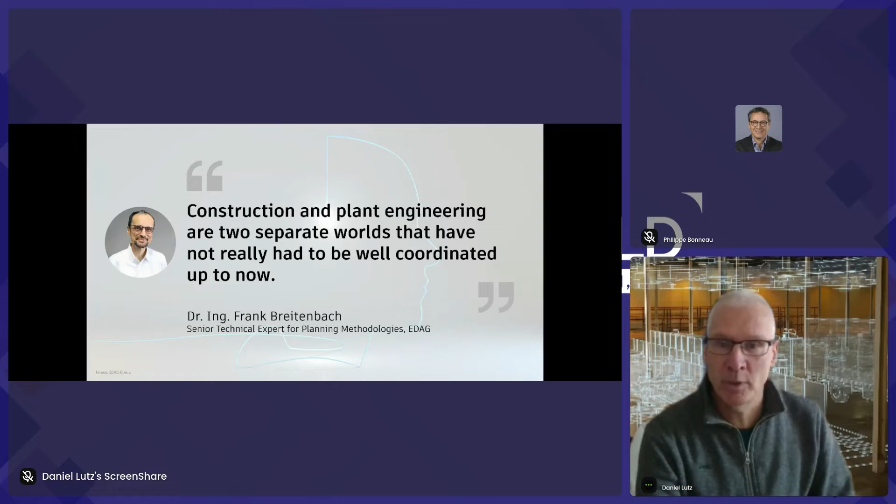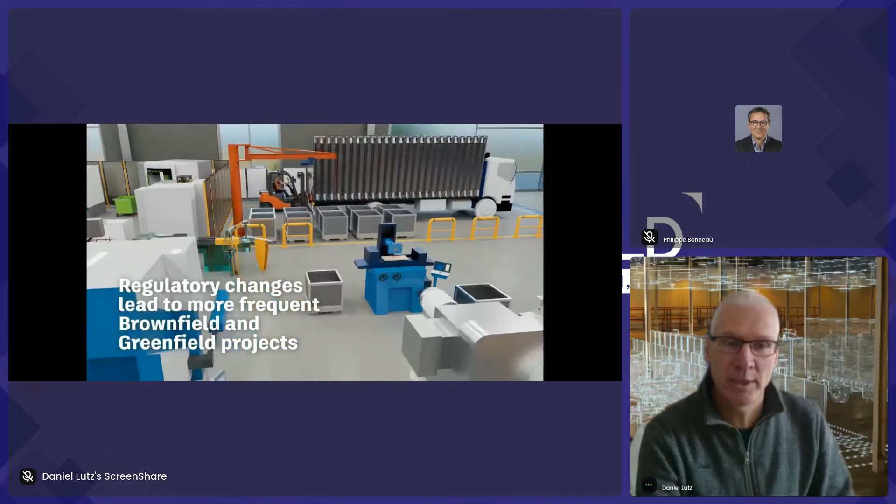So I start with this small teaser. We see a lot of data from this video, but I speed it up a little bit. The reason is we have a lot of stuff to cover in 30 minutes.

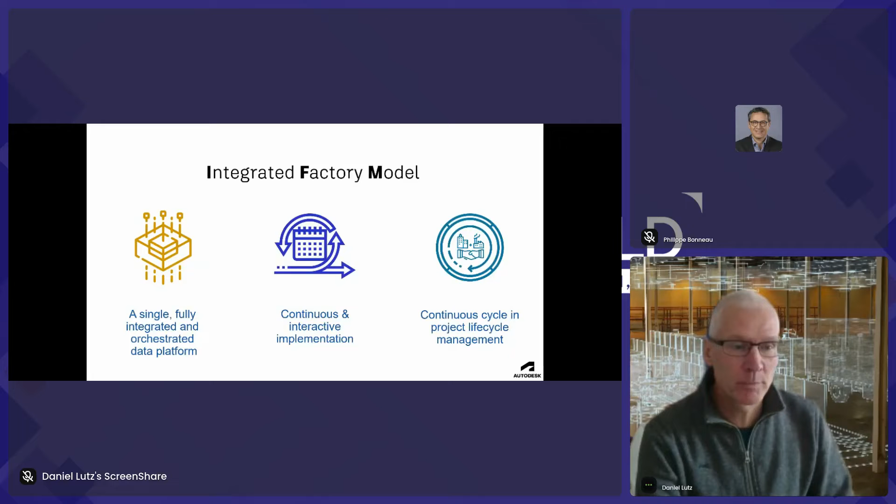So what are our challenges during the day and the whole week? We have new products, demand changes, cost reduction, quality initiatives, and changes in procurement. For that, we use the integrated factory model as a single fully integrated, orchestrated data platform for continuous interactive implementation and a continuous cycle in the project lifecycle.

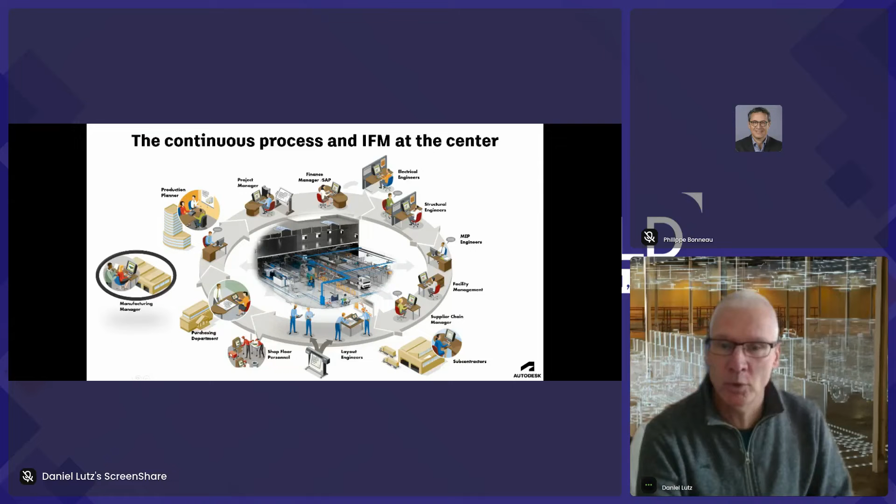We have a lot of participants and stakeholders around the factory model: project managers, MEP engineers, suppliers, and so on, and a lot of people for coordination of a factory. We have a lot of data in the different departments, for the supplier, in the manufacturing, and we must organize all the data and the flow of the data. On average, we have over 40 apps during the day which we work with.

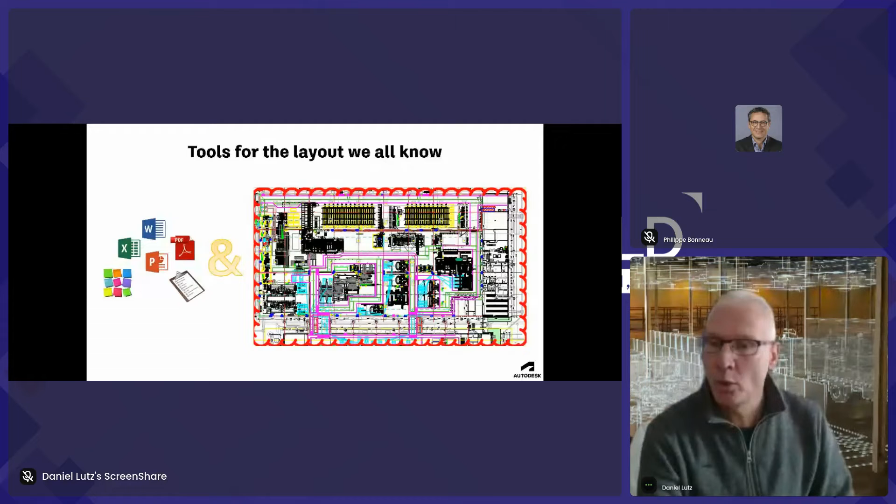So what are our goals? Normally we know this kind of drawing: we have a lot of layers, we have colors, and it's very hard to understand this kind of drawing. But that is only a little drawing, and by its side we have a lot more documents like Excel, Word, PowerPoint, or a classic sheet. I want to focus today only on production planning, the technical building equipment, the MEP, and the building.

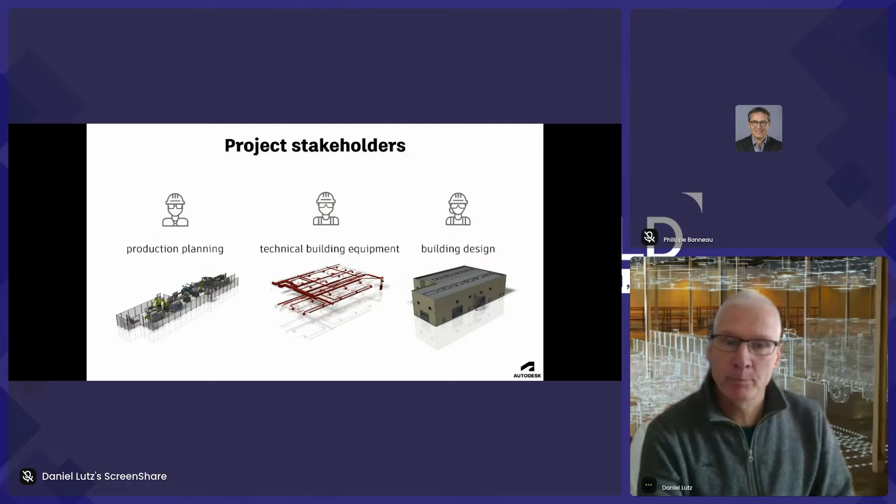So normally we start with a classic 2D drawing, a DWG, and we have, for example, the environments for each product line. We work with driveways, and each layout planner plans his layout in this space. And in the end we arrive at the MEP drawing.

And now we have the same complicated drawing as before. But now I start again with a 2D drawing. It's not wrong to start with 2D, but now I integrate a 3D workspace, not only 2D. But that's not a function, it's a kind of workflow. It's an idea from my side.

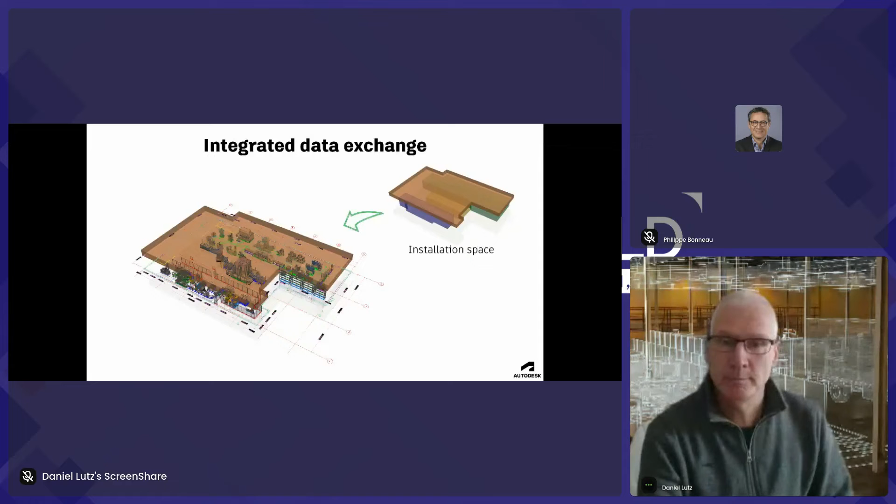This 2D or 3D workspace is coming from Revit in this case. In the next step, each layout planner could plan his layout in his workspace. Then we replace the workspace from the MEP and integrate this MEP data in Inventor with AnyCAD for Revit, and in the end we integrate the building.

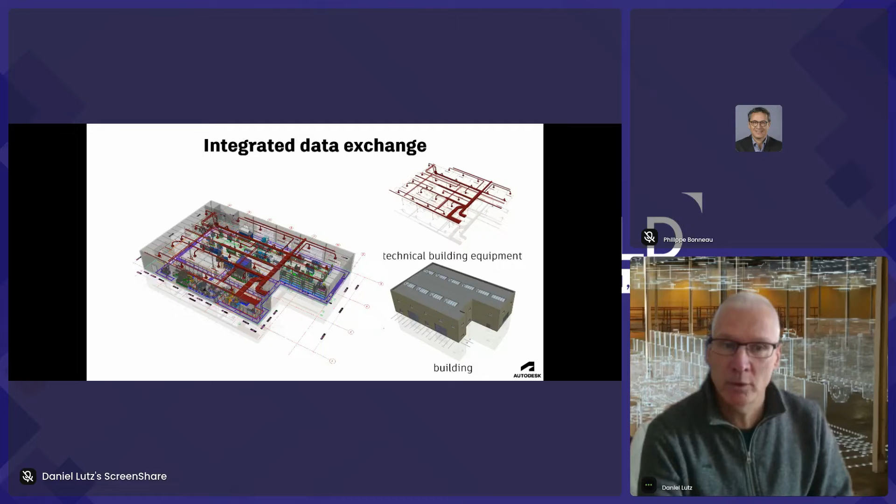Now we have a fully detailed model, a 3D model in Inventor over the whole factory. Again we start with a complicated 2D drawing, but that's what we need.

We need a 3D model, in this case in Navisworks. Now we append all the data, engineering data, MEP data, building, and so on. And now we have a nice workflow in the building.

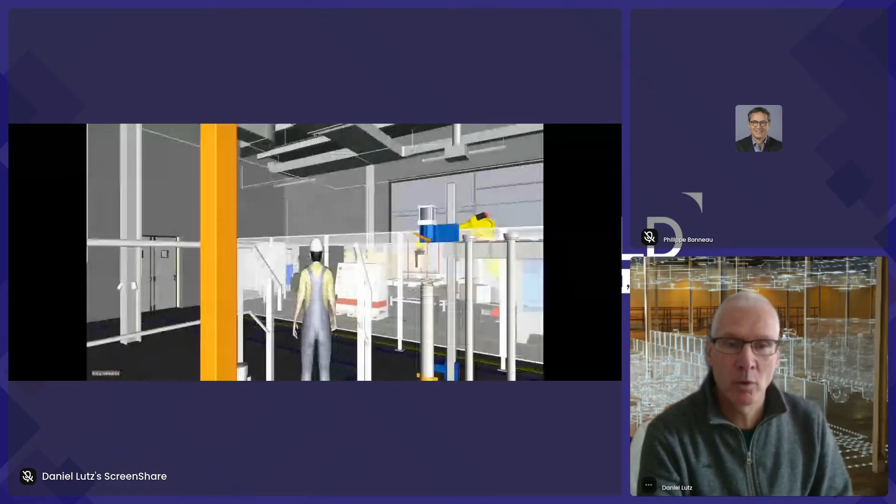I think you all agree with me, that's a much better basis for the discussion with the customer, with the supplier, and all participants. We see much more in this model than in a 2D drawing. So then let's go ahead.

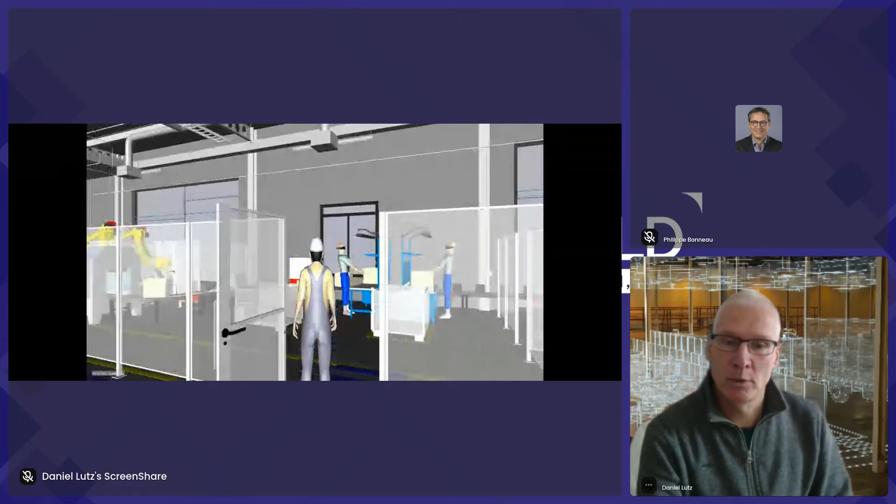Here again, this small video about this data set.

Now we start with the layout and MEP, and at the end we have the building. So in the next step, we look a little bit at the software.

For the factory design utilities, do you need a product design and manufacturing collection? Today we focus on the factory design utilities inside Inventor, AutoCAD, and Navisworks. By side, we could use Revit or the AEC collection to collect all data on the D&M side or the AEC side via Autodesk Docs. That's another very important point.

We have with AnyCAD in Inventor a lot of capabilities to integrate supplier data from CATIA, SolidWorks, Solid Edge, NX, and so on, on the left side, and the internal Autodesk formats like Revit, Fusion, AutoCAD, and so on.

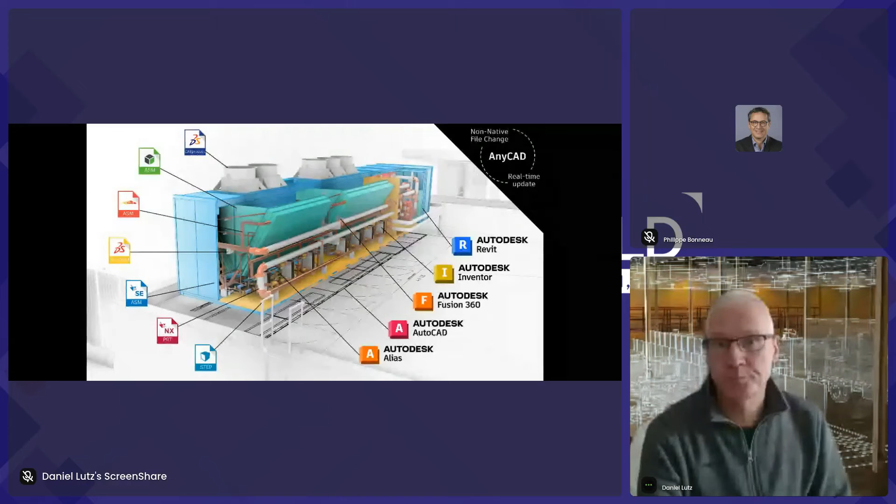And we see here the plugins from the factory design utilities. It's a separate installation in Inventor, AutoCAD architecture or mechanical, and Navisworks. And the most important point is the asset library. We get here an asset library, object library, out of the box with over 7,000 assets, but we could integrate our own assets.

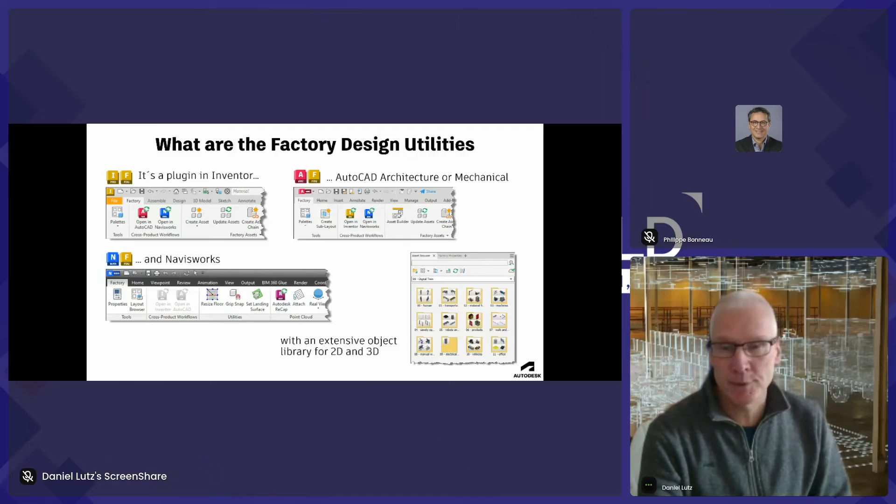Now in the next point, we take a look at the factory design utility workflows and functionalities. Again, we have here the asset library, and it's available in 2D in AutoCAD and in Inventor. That's very unique in the market, to work in 2D or 3D and get an update on the other side.

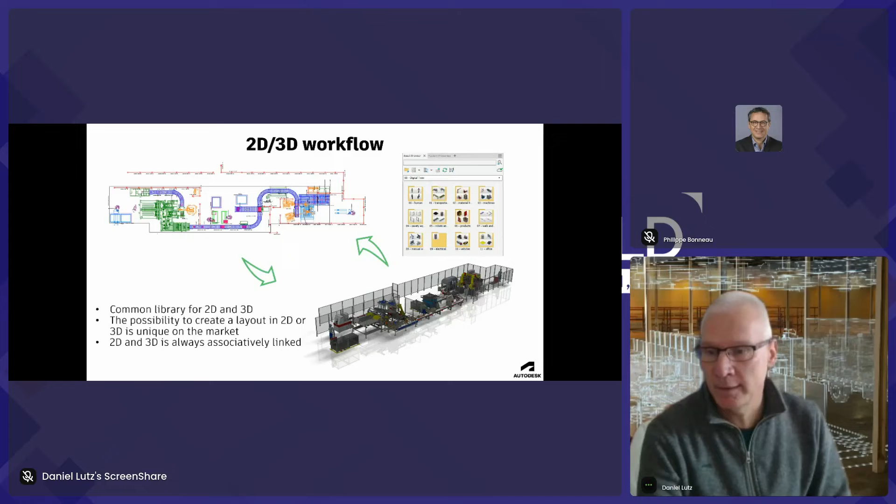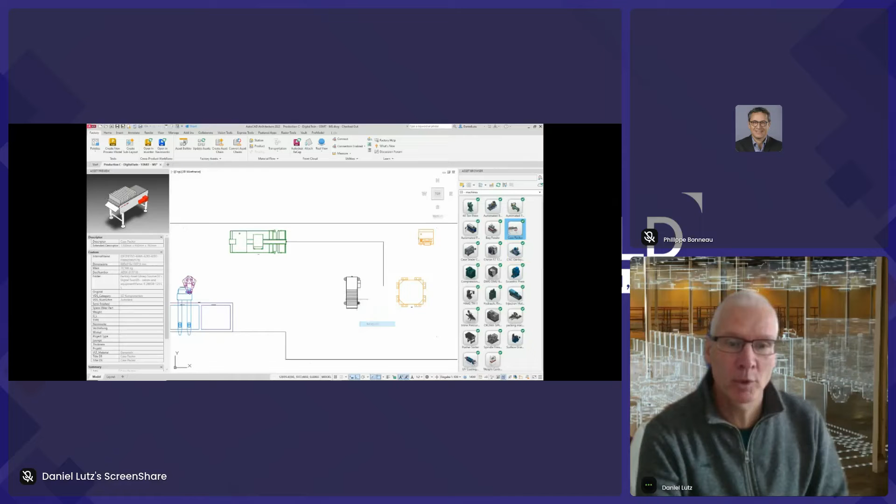So let's take a look at the functionality in this video. We see here on the right side the asset library, and we place here the 2D blocks, very normal, you're probably familiar with this kind of block. And we place these blocks on the end of this polyline.

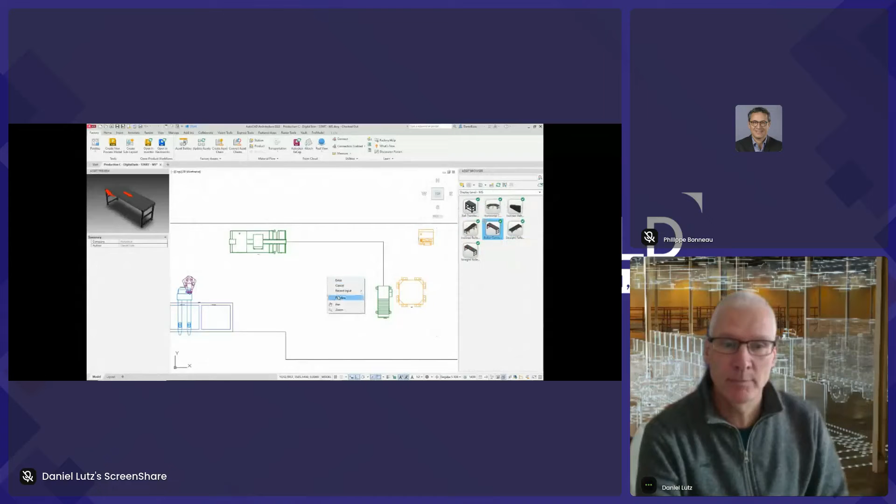But now I'm using a special kind of object, a chain asset. I place this chain asset on the polyline, and the thickness of the line is the width of the conveyors. Now in AutoCAD, I convert this line into different conveyors. We see a blue one and a red one. The blue one is the standard length, the red one is the custom length. And I do the same with a safety fence.

And with that, I jump to Inventor. In Inventor, it creates automatically 3D assets in the layout. And the reason is we have the same library for 2D and 3D.

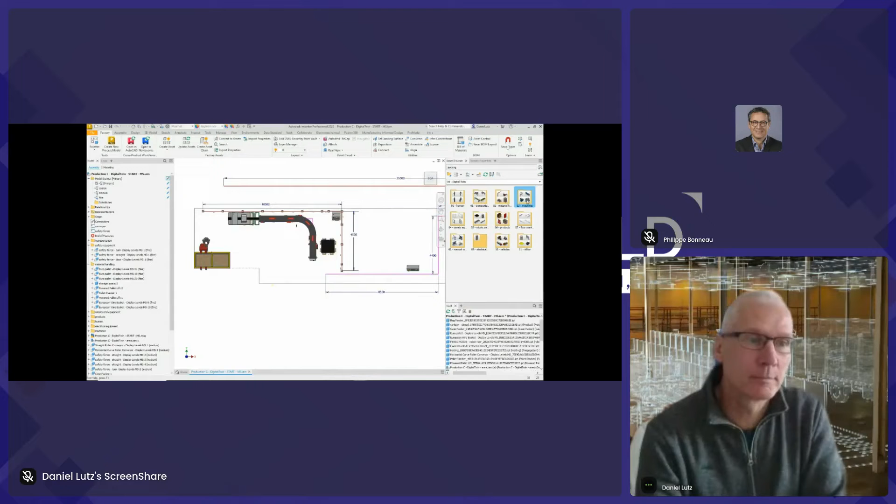In the next step, I go ahead with the 3D assets. I could do the same in 3D. The 2D and 3D workflow, it's not a must, it's a could. If you want to work fully in 3D, you could start in 3D, or you do it all in 2D. That's no problem, that's your choice.

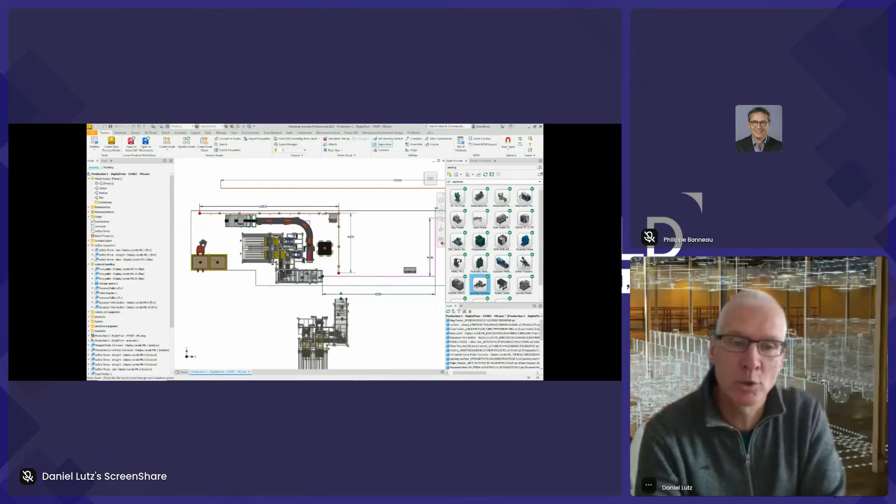So then we see here a sketch line, and I'm using again the chain assets, with the conveyors. I select this sketch line, and the system calculates automatically all lengths of the conveyors and places the 3D conveyors on the sketch line. Again we see here the standard color is blue, and the red one is the customized length of the conveyors.

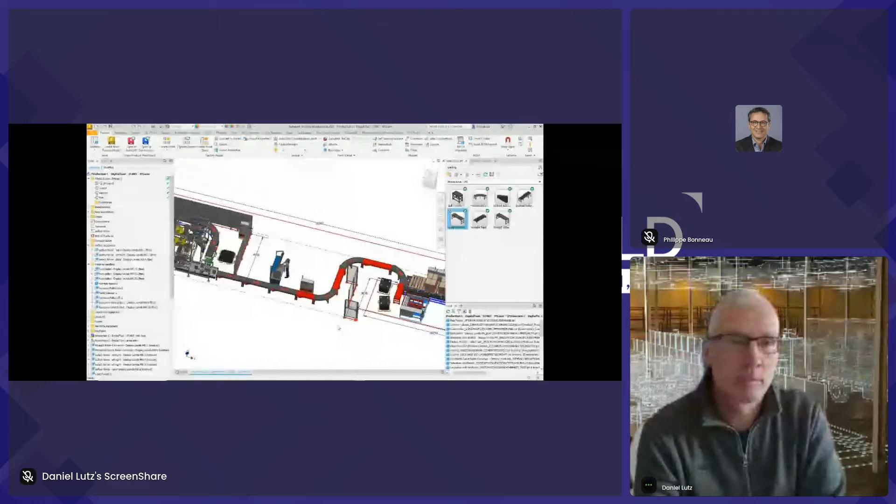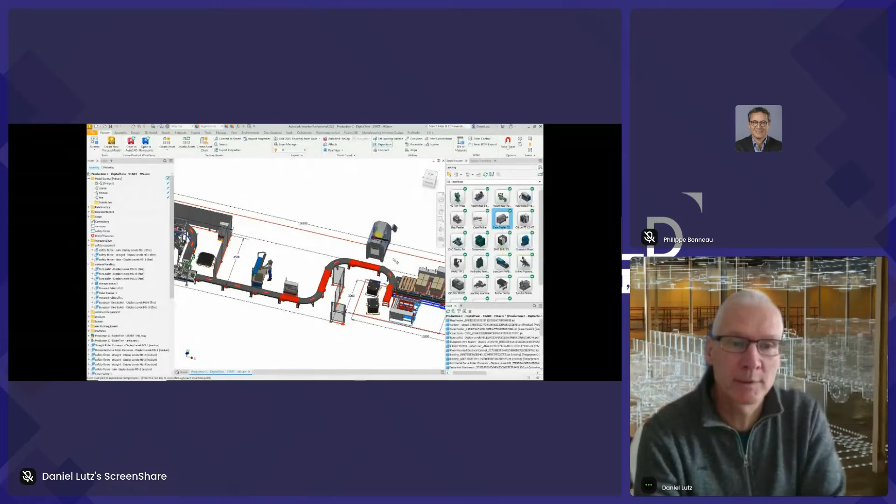In the next step, I place a small template with a workbench, a worker, and a box on the bench. I place a machine, but I want to place this machine in the middle of these red conveyors, and it doesn't work.

This is the reason I select here the form, the iLogic form, and enable this connector, and now I have two green connectors and could place this machine correctly in the middle of this conveyor. You see here in the functionalities, the asset library is like a Lego box.

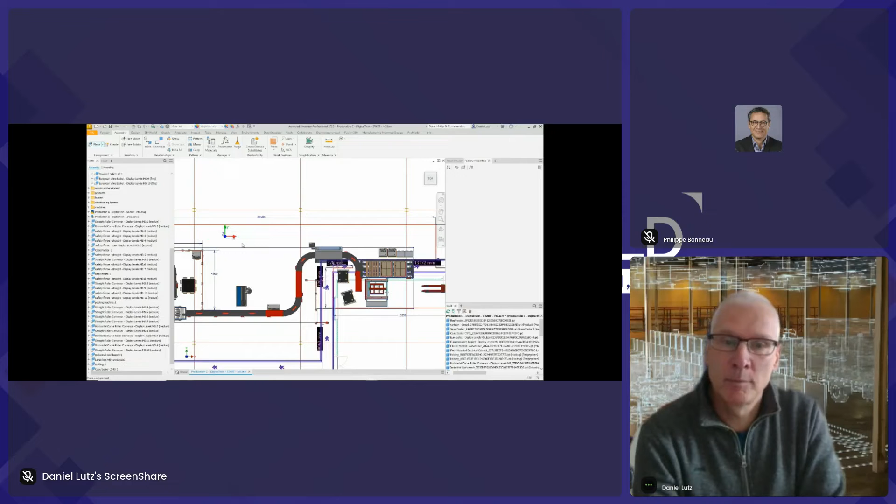In the next step, I place the walk and driveways. I want to check the place of the display of the machine, and we see here the display is inside the driveway. With that, I open the iLogic form, turn the machine, and mirror the displays, and now it looks fine.

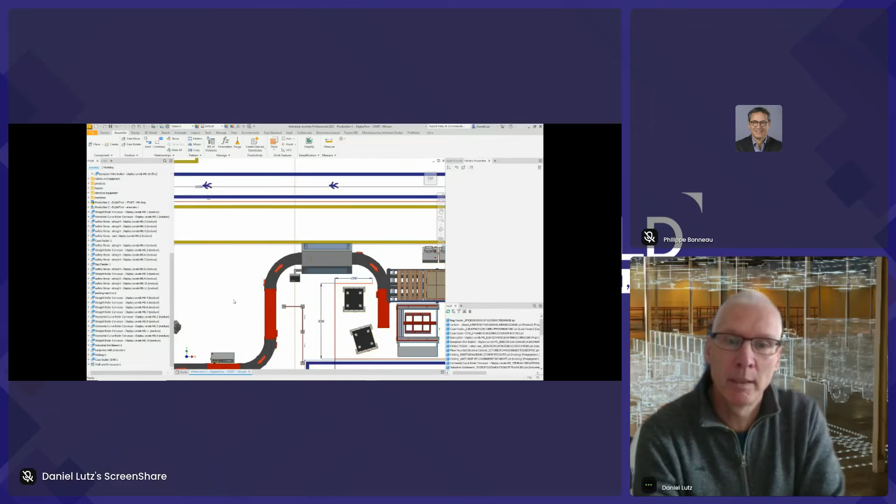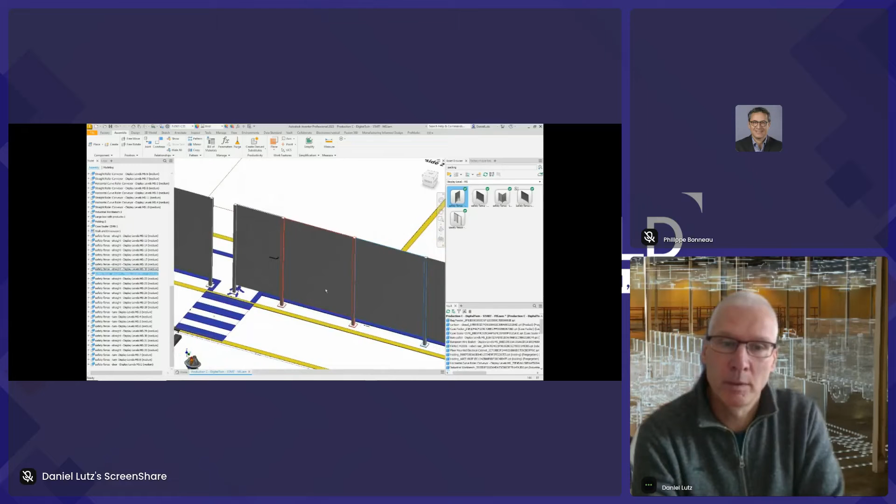In the next step, I place the safety fences, using again the chain asset and selecting a sketch line, and in a couple of seconds I have placed all safety fences around my layout. But here I need a door, so I delete this fence and place a door with the connectors. You see on the left side a little gap, and to close the gap I open again the iLogic form and change the length of these two segments on the right side.

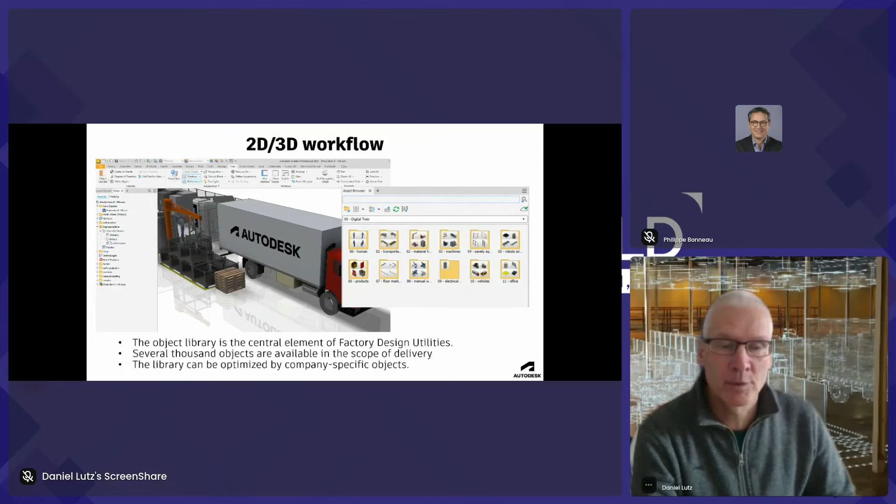And so I could create my layout step by step. Then let's jump to the next. Small summary: we have here in 2D and 3D the object library, and it's very easy to create layouts step by step based on the library and the connectors.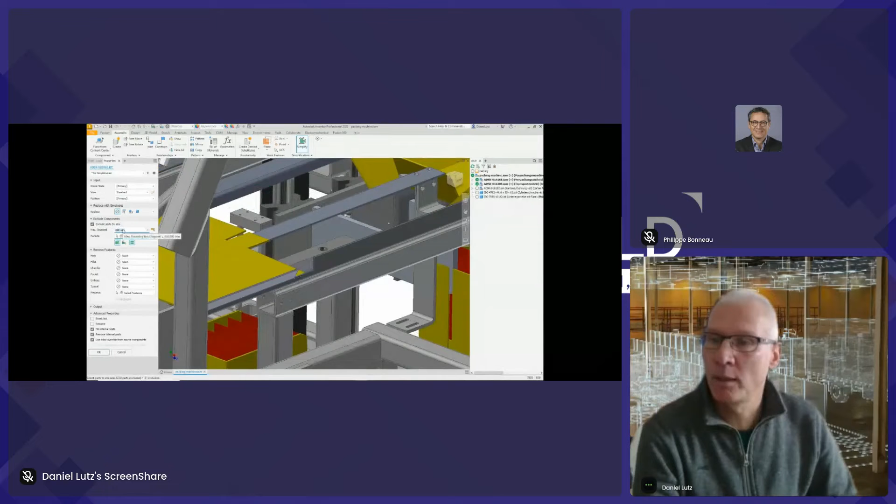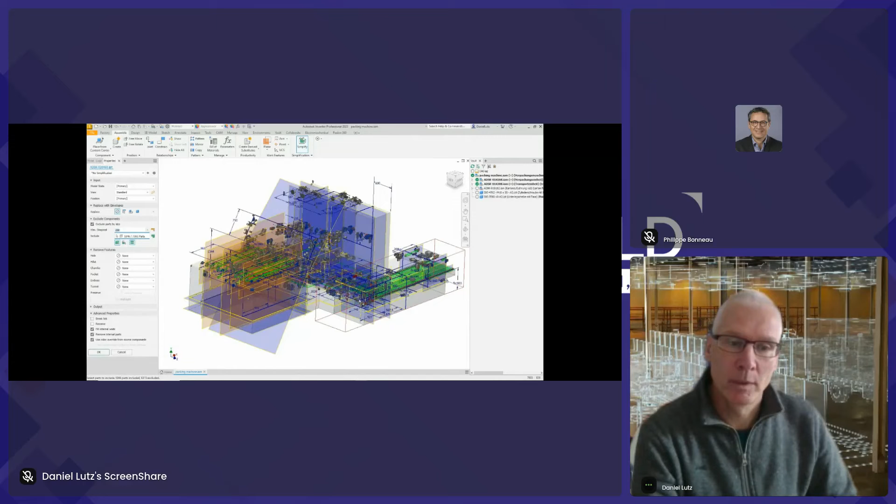So for the simplification, we use the simplify option in Inventor. We select small parts by size, 250 millimeters in X, Y, Z. And we see now we have selected over 6,000 parts. To see all these parts, we change the view and remove a couple of parts on the visible side.

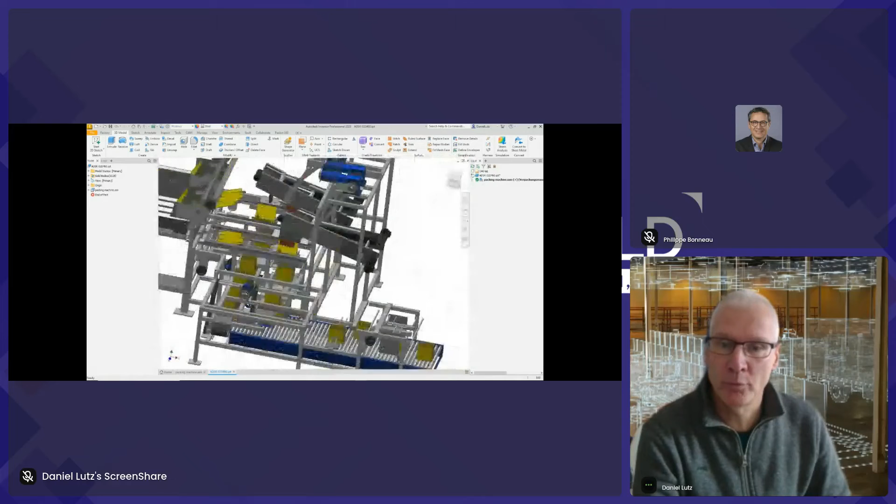So once finished, we invert the view again. See here all these parts. We define the remove features, using a preset where I've predefined all these dimensions. In a couple of minutes, in this case 2 minutes, I have only one part without small features and without all small parts. And now I jump into the asset builder.

Define in the first step the landing surface, and define the insert points.

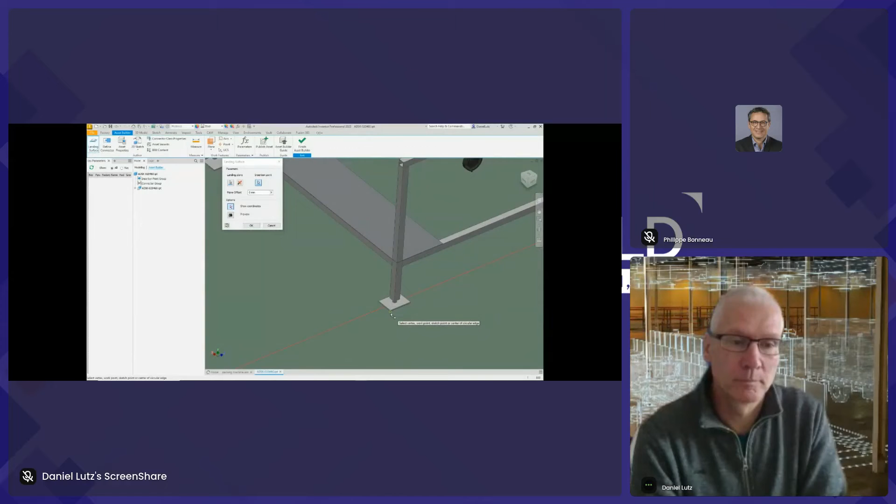Next, I create an insert point for a connector. I want to add later here on this point a conveyor, and for that I must define a connector directly on this work point, defining the direction in X and Y. And we see here now this connector.

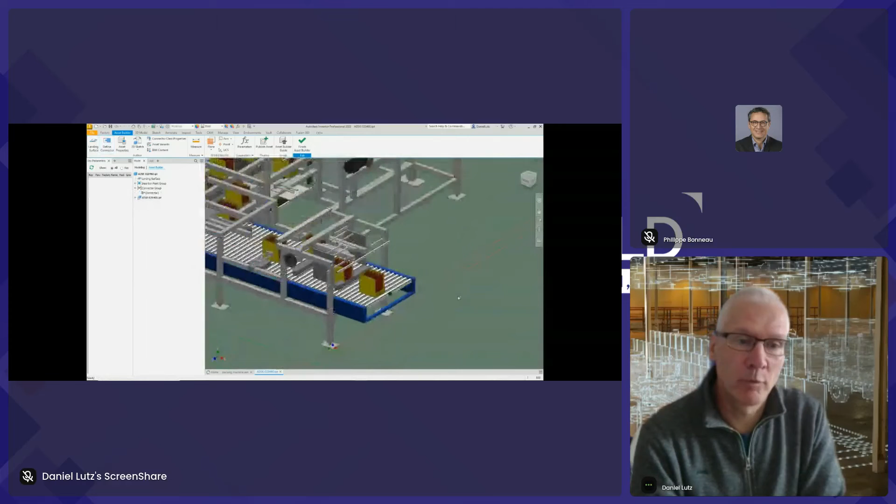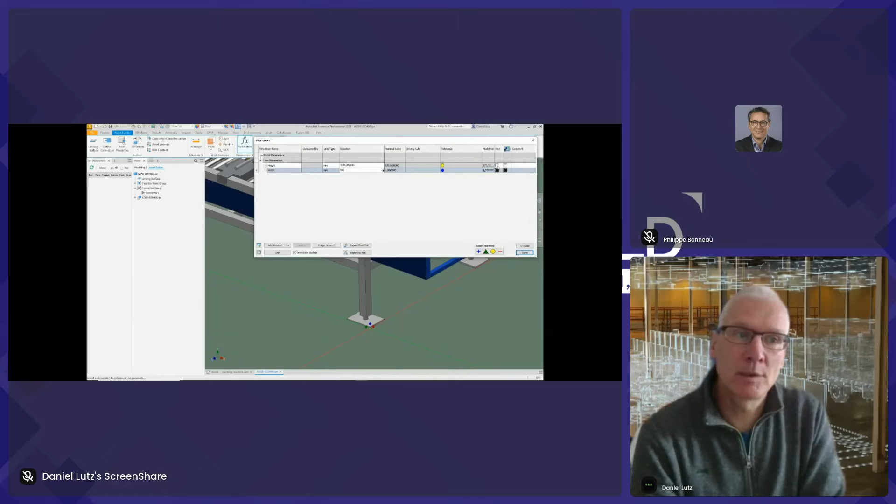In the next step, I define the height and the width of the conveyor. With that, if I place later a conveyor, the conveyor looks to the machine, and we see here these dimensions. If I place the conveyor on this point, the conveyor has the correct height and width.

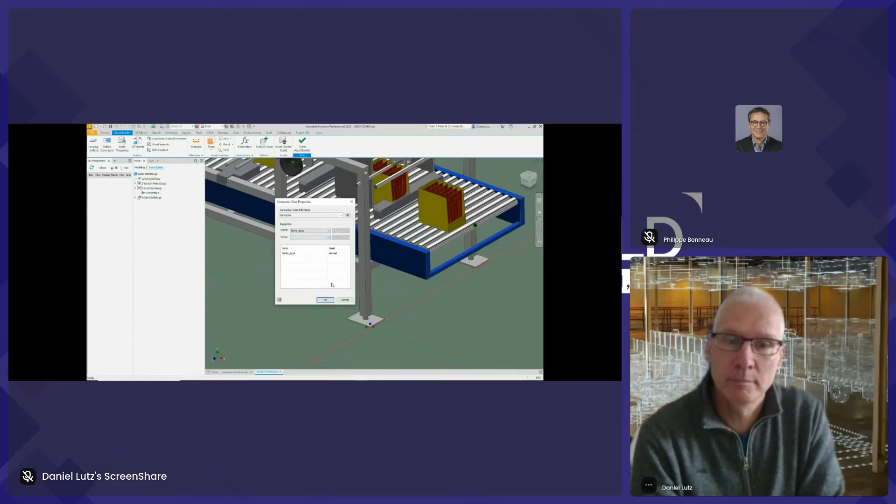And the last step, I define a layer. This layer is available in 3D and in 2D. And the last point, I need a connector class. This connector class shares the data or the parameters between this packaging machine and the conveyor.

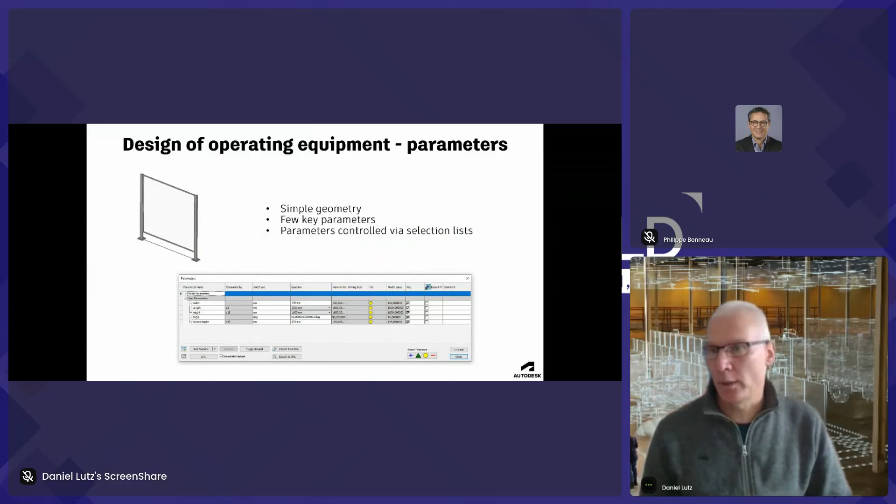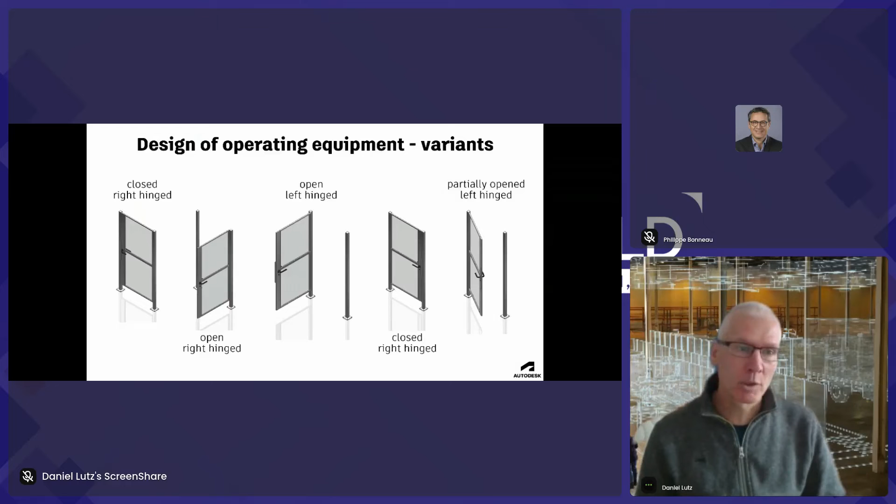Okay, now the creation of the assets. That's not easy to explain. We have here a simple part, a simple safety fence with a couple of parameters. I think that's finished in 1 or 2 hours, that's really easy going. But we have here, for example, this door that's hinged on the right or on the left, it's open, it's closed - that's a little bit more workload.

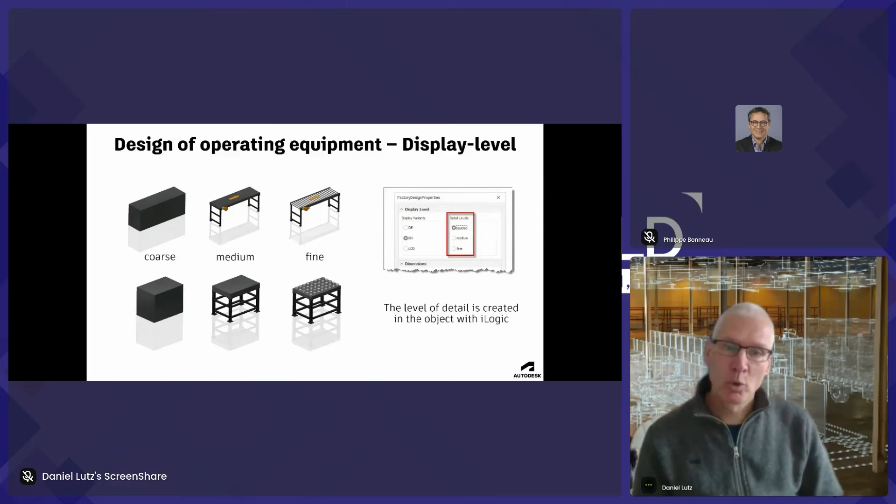It means we have a couple more parameters, and I'm using iLogic to program this door. In the next step, for example, I have these conveyors with different display levels - that's more workload. I have here a longer model browser and more rules, and in this case I must create a separate connector class. You see here it's very different how big the workload is to create these assets.

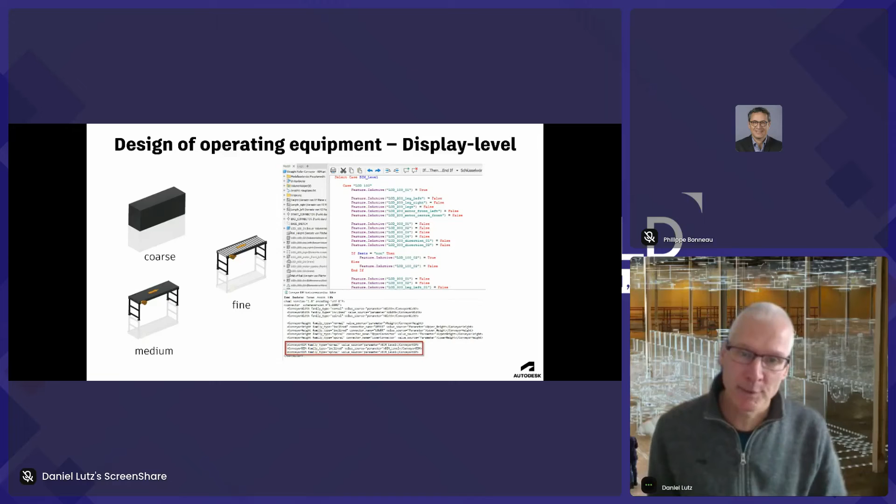And now we see here the asset form from iLogic, but that's very easy to create these forms. At the end, we have here the level of detail or level of display - coarse, medium, and fine for the last presentation in front of the customer.

Next step, we have the chain asset. We saw it before - now we have here only a line, could create a thick line in 2D. We could convert this line into separate assets, and we have the same in 3D.

And the last step, or one of the last steps, we could create different colors of the connector. That means we have a green default connector. This green default connector works with all other colors, but in this case, the blue could only work with the blue and not with the red or green. That means you could integrate small rules for how we could or what we could connect with the other parts.

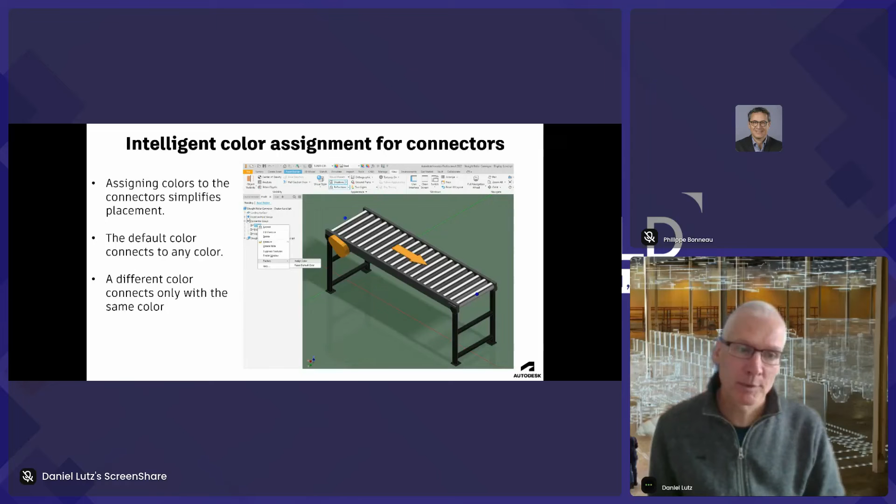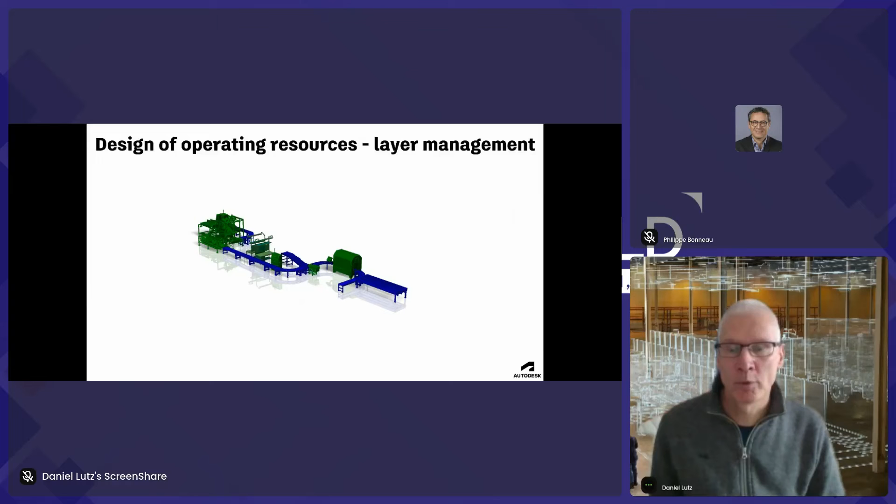And in the end, we have the layer management that's based on a simple 2D drawing in AutoCAD, linked as a template in the factory options. So we have this layer in 2D and in 3D, and we could organize all assets - in this case green for machine, blue for transportation, other green for workbenches, orange for robot equipment, red for the safety fences, and we have the same in 2D.

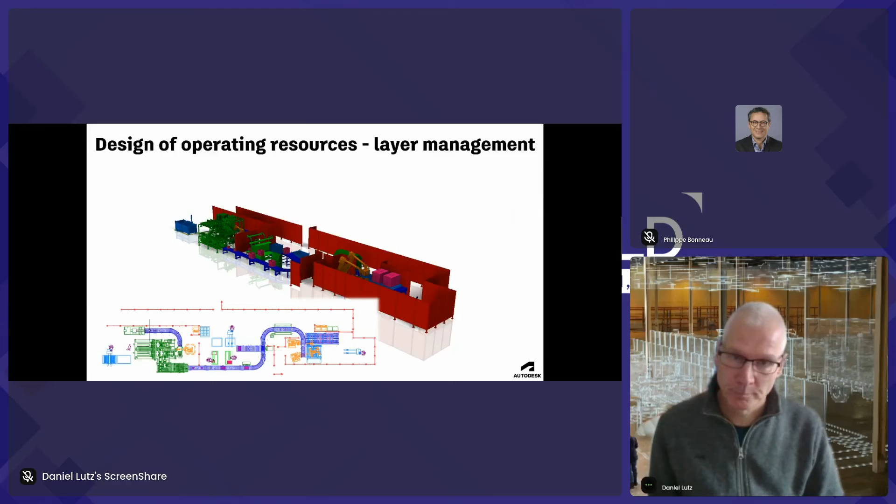And those are the 5 steps to create assets and all capabilities for the assets.

And next, we have the building integration. Before, we were talking only about the factory layout, and now we integrate a building. We see this layout before, and also before we integrate the MEP from Revit and the building from Revit. You could integrate this data with original Revit projects, or we could use IFC.

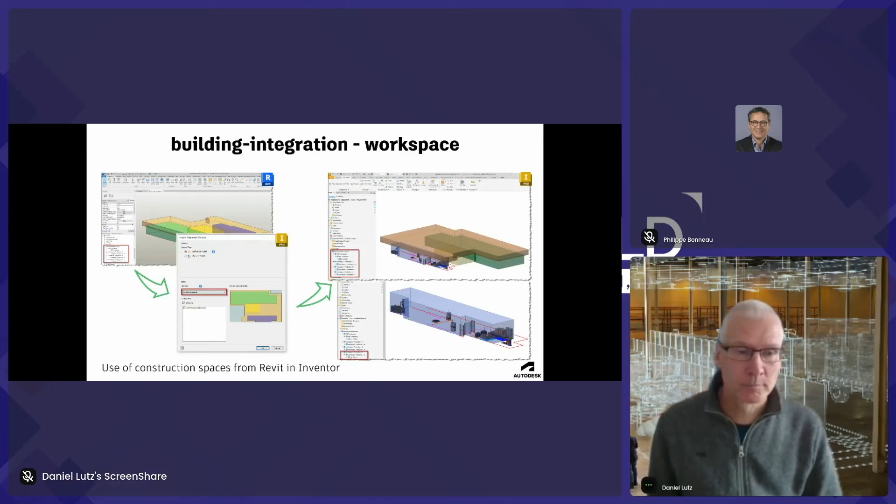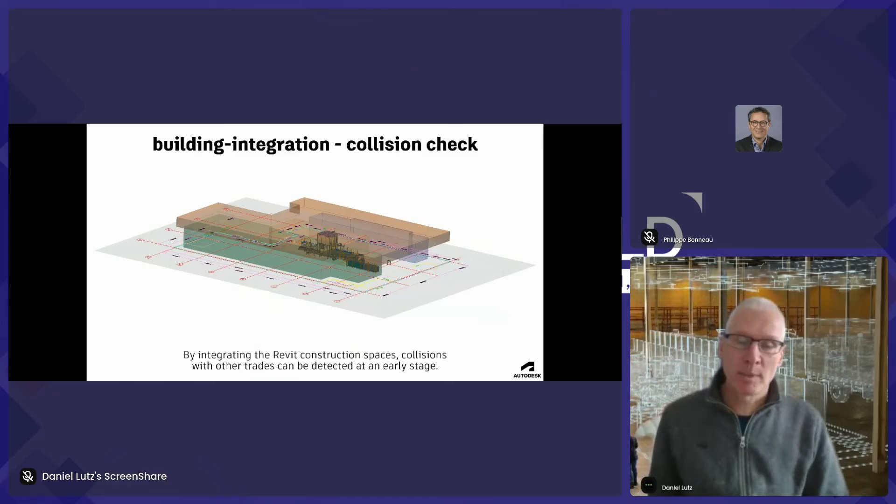So we start again with this installation space. This installation space is created or defined in Revit, and we could load this Revit data in Inventor. What are the benefits? We see here this installation space in Inventor and the machine or the production line in the middle, and with that, we see in a very early stage the collision between the machine or the cabin of the machine and the workspace of the MEP.

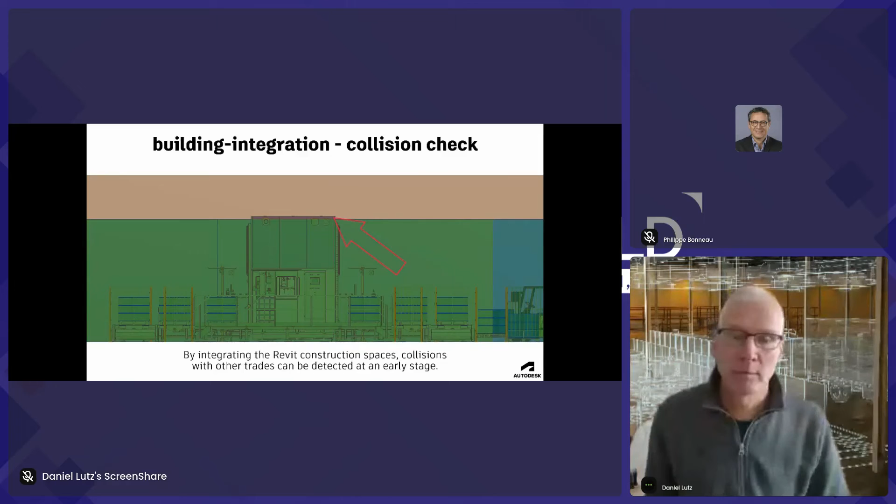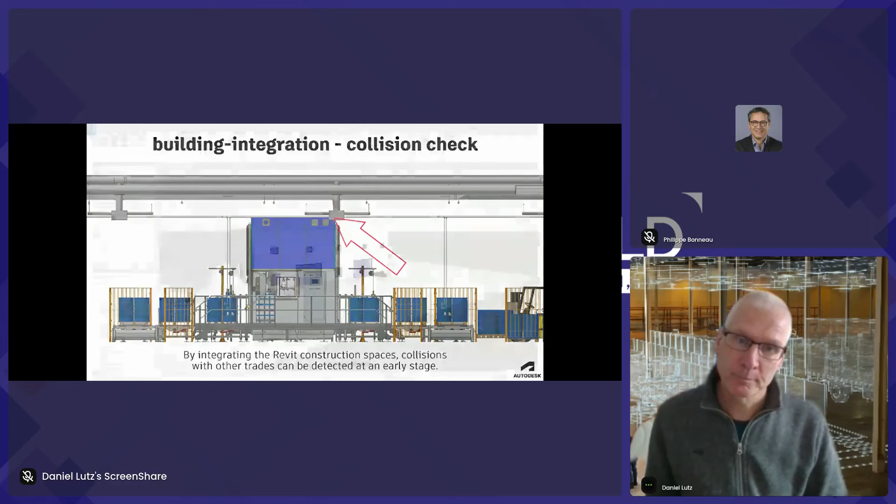And for a better checking, we replace the workspace with the original data out of Revit, and see here very fast the collision between the ventilation output and the cabin of the machine. So let's jump here in this video. Checking my time.

Okay, we see here this separate view in Revit. Go to Inventor. Open this Revit model with the AnyCAD for Revit, and place this workflow on the origin point.

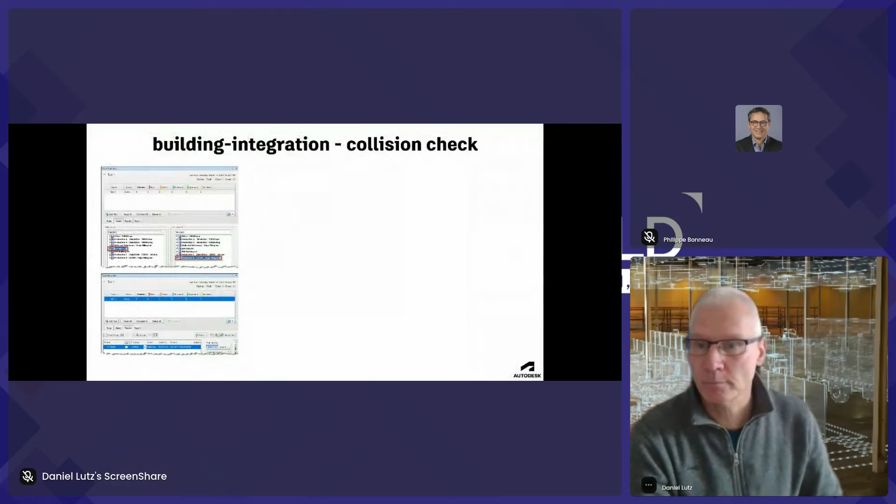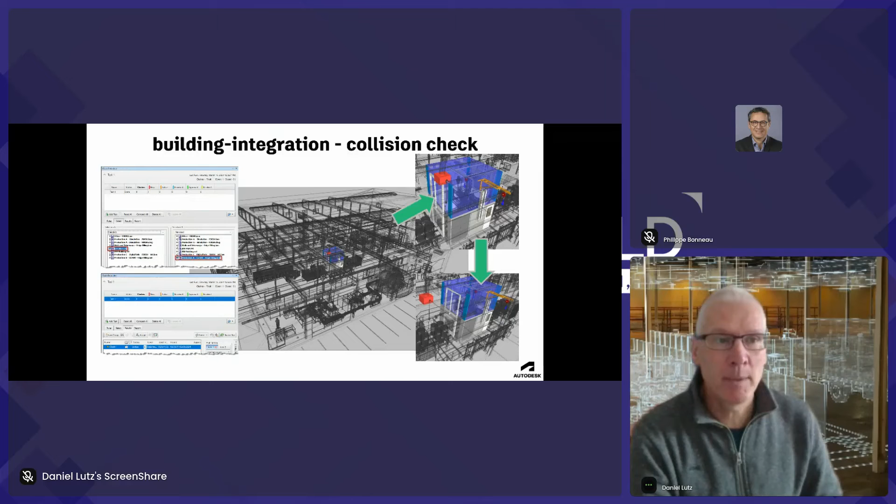You see here again this collision between the machine and the workspace. For double checking this issue, we're using Navisworks and the clash detective functionality from Navisworks. In a second, we have here in the view the collision between the MEP and the machine.

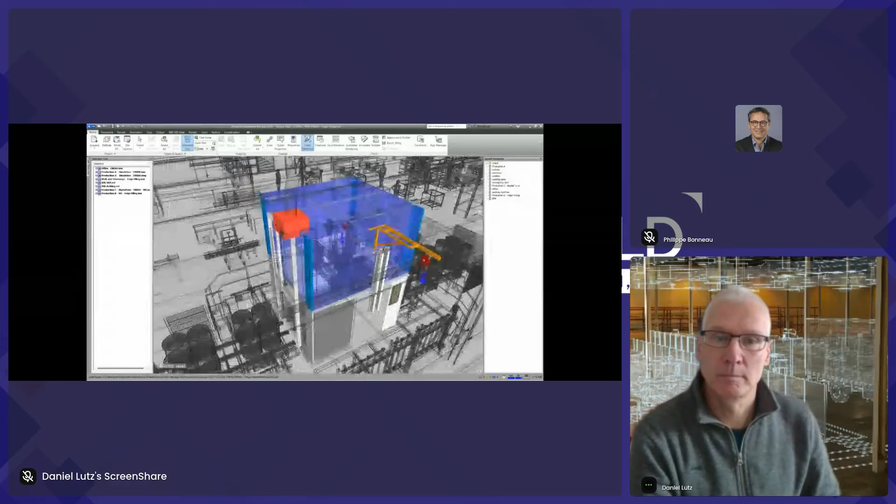How do we solve this problem? We are here in Navisworks, select the MEP and the production, and see here this collision. Go to Inventor. We hide the workspace, go again with AnyCAD

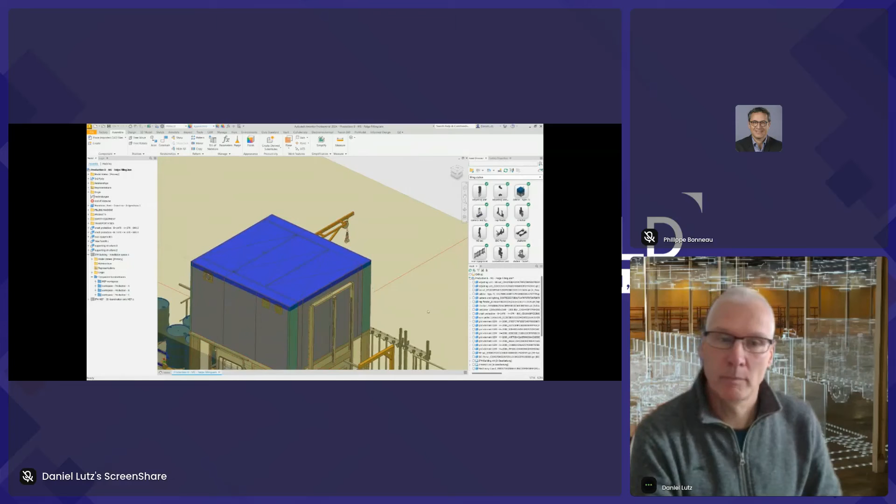to the Revit model and include here this data from Revit. Okay, and now we see here again this collision. I hide the MEP, unhide the workspace, and we see here we have enough space on the left side for moving the machine.

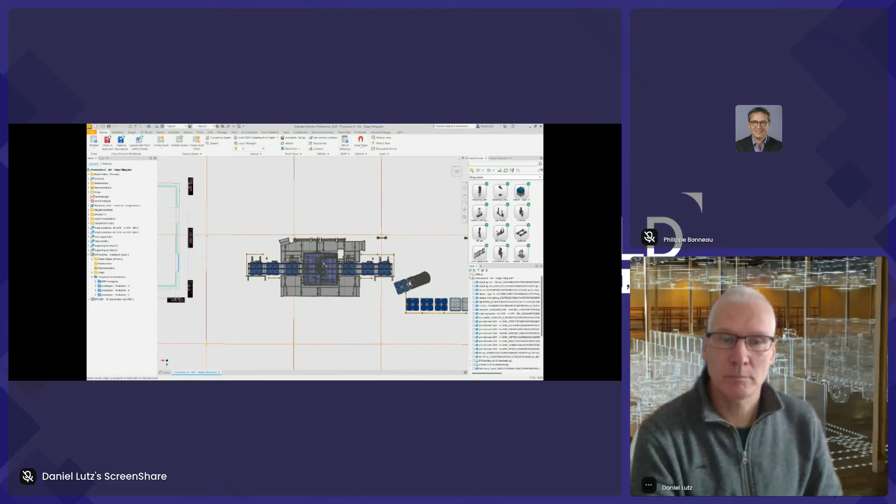With the factory design utilities and the move option, I select all these assets, go to factory, reposition all data .5 meters to the left.

Unhide the workspace again. It fits well, so it's fine, and looks perfect. Now I think we have no clash. We go back to Navisworks, run the clash detective again, and we see here this clash with the status resolved.

With all this 3D data, it's very easy to find all these issues. And I think you all agree with me, it's very hard to find this clash on a 2D drawing.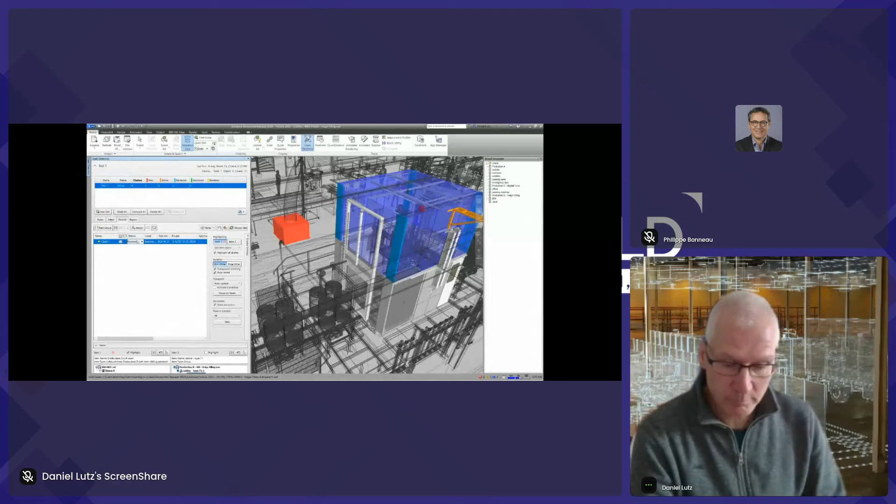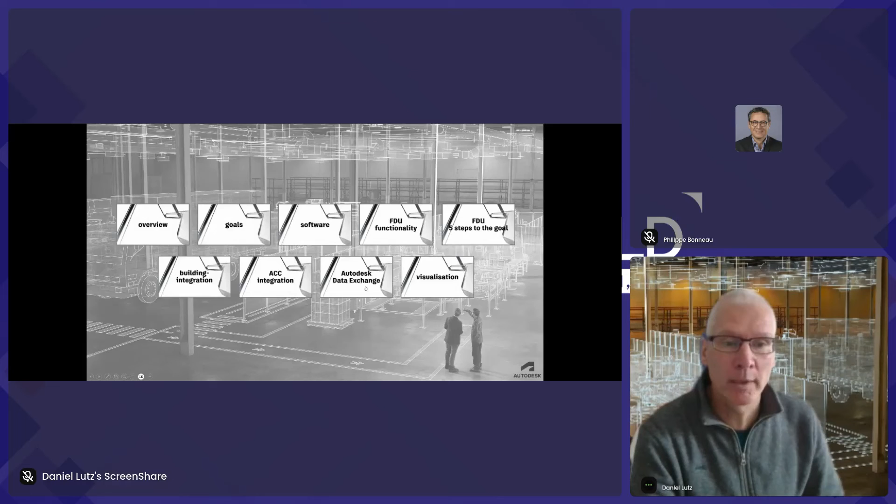So then let's go a little bit to the data exchange. I'll jump over to the ACC integration since we're running out of time. Now that's a new functionality from Autodesk, the data exchange, and that makes it very easy to share data with the ACC. We see here a few of all available plugins in Inventor, in Revit, in AutoCAD, and so on.

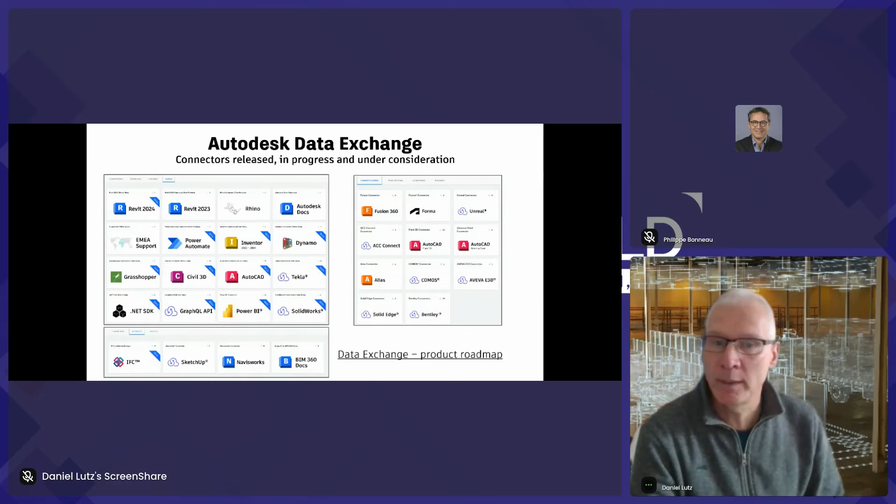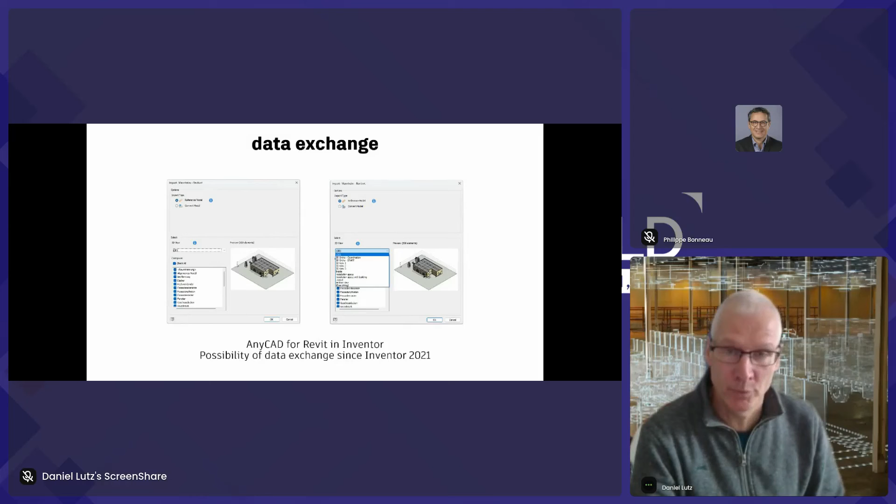Before, to see the import of the Revit data in Inventor, we must open the Revit project, select the view, and select all these categories of the different views. Now, with the data exchange, we could open this much more easily, connected with the ACC, the Autodesk Construction Cloud.

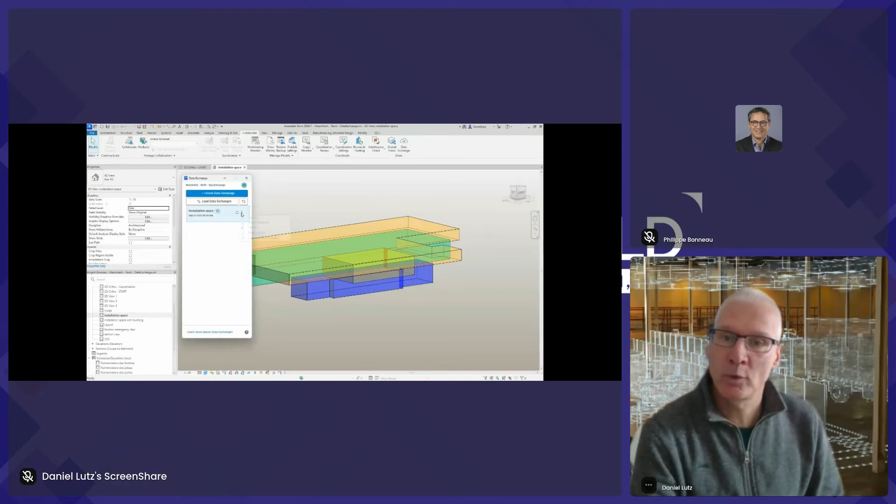Here, different workspaces. Go into Inventor, and open this workspace on ACC, and load this data in my layout.

You see in the browser here this model is coming from the cloud, with the cloud symbol. Then I create my layout, and using also the data exchange plugin in Inventor, upload my data to the ACC.

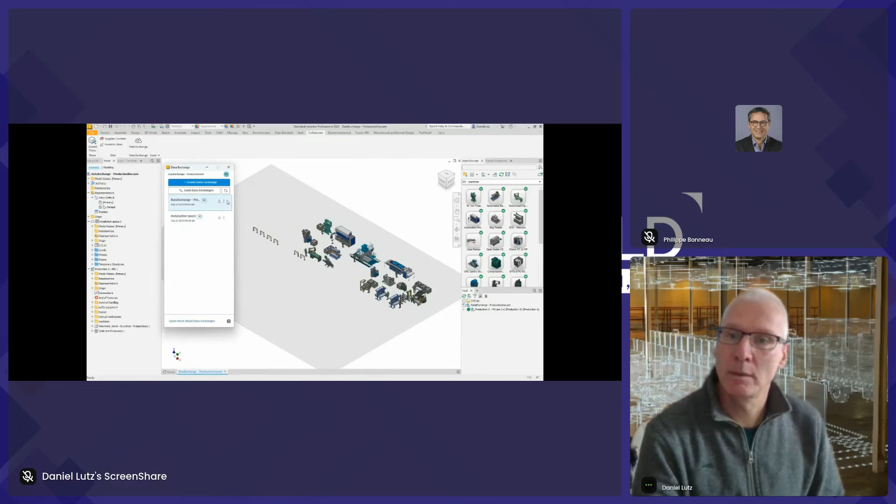Now I go back to Inventor, and in the first step, to Autodesk Docs, and check the preview of the data in the web. Now we have here the whole bill of material with each machine and have all properties of the machines available. Then back to Revit.

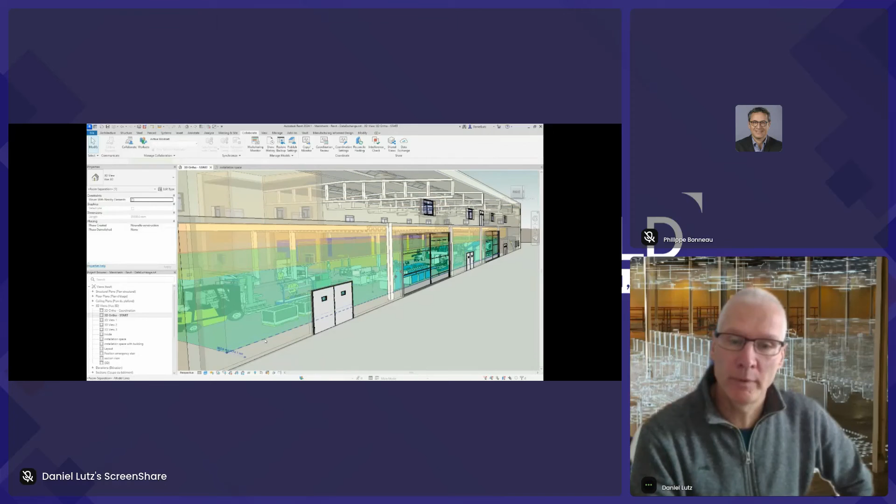And I open here this data exchange coming from Inventor. Now we have here in Revit a fully detailed model, and that's a very easy way to share data between Revit and Inventor.

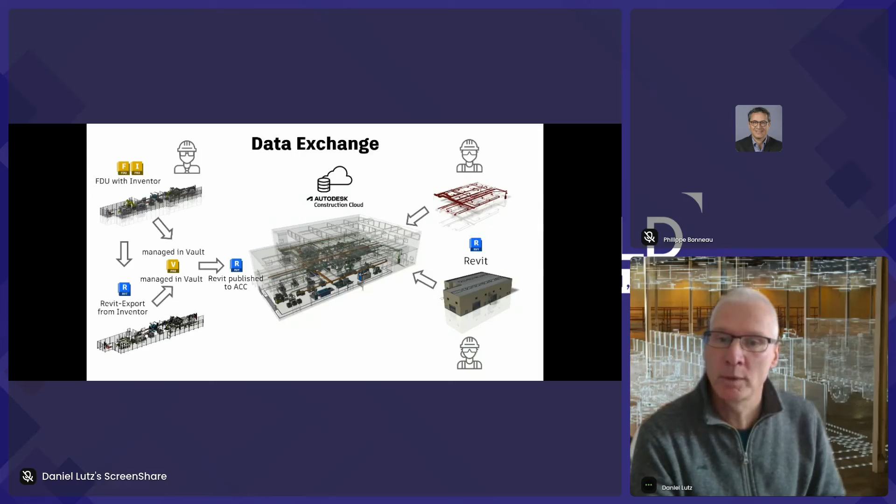So here we see before, we have factory design with Inventor. We could export a Revit project, manage this project in Vault, and upload this data to the ACC. But with the data exchange, we could do this all directly between Revit and Inventor.

And in the end, we're coming to the visualization. For example, out of Inventor and Revit, we could upload or add this data in Navisworks. And with the cloud rendering, we get here very easily, with a couple of clicks, a panorama view with the cloud rendering. If you have a smartphone available, please scan here this QR code.

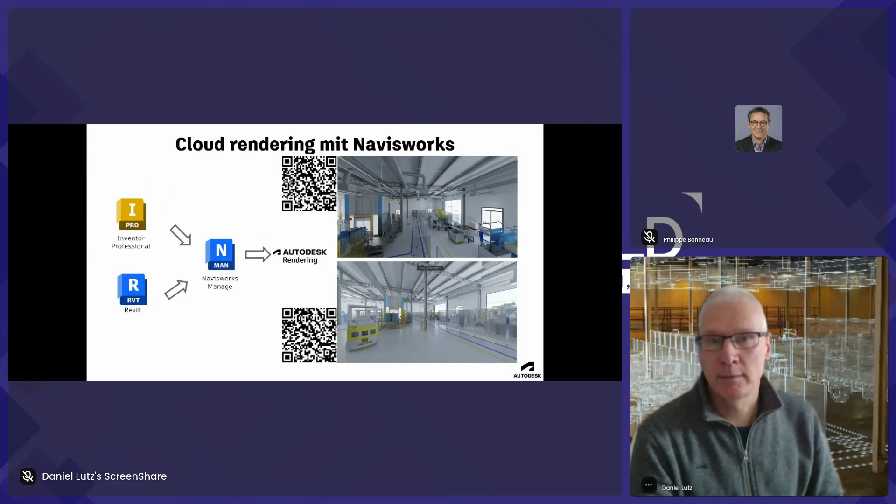And then we get here a very nice panorama. And if you scan this QR code, you have here this nice panorama view.

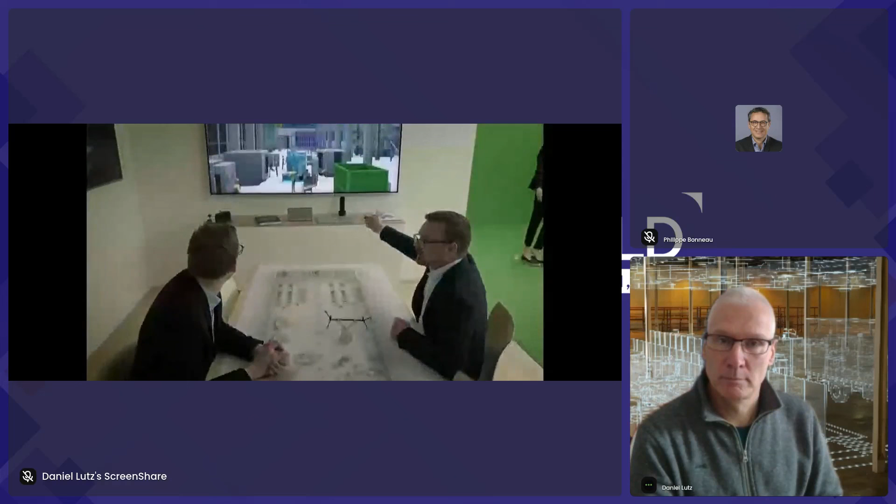And with that, jump here a little bit - that's VR, AR, and VR in our VR room in Munich.

And with that, I'm finished with my presentation, and I open up for answers and questions.

Thank you so much, Daniel. It was really very impressive, and I love to see products in action. You have shown so many videos, so many ways to use Inventor, Revit, Navisworks, Autodesk Construction Cloud, and many more products altogether. It was really impressive. So thank you for that.